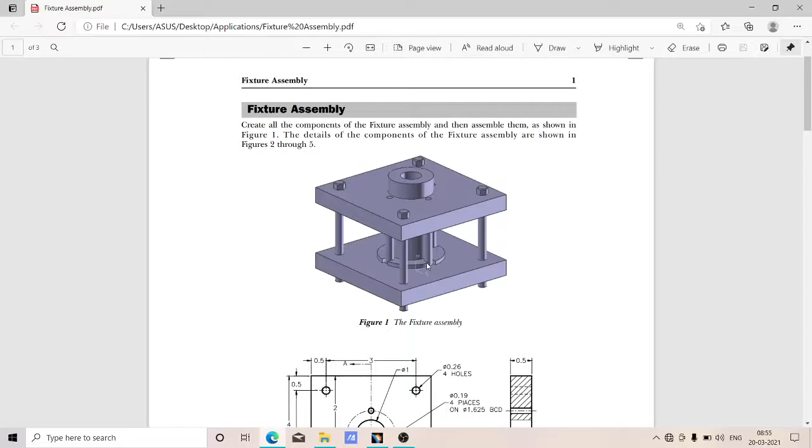Today we are going to make a disk from this fixture assembly. See, this is the disk. Now let's make it.

Select plane and now let's start. For that, first we need to make two circles of diameter 2 and diameter 1. So let's make it. Make two circles.

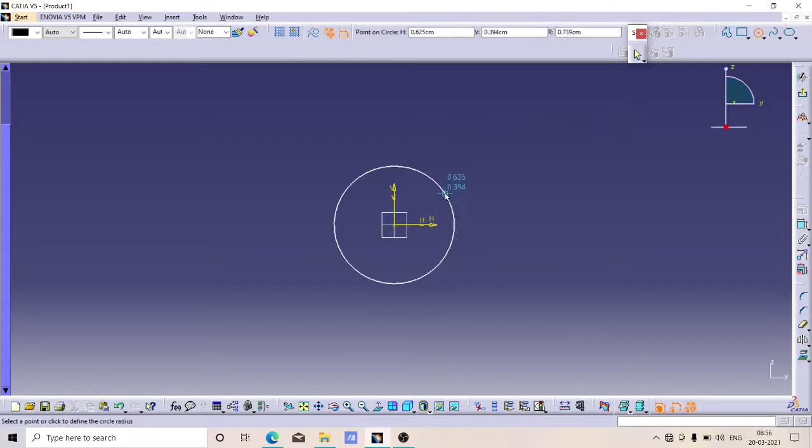From the constraint option you can give diameter to circle. This one is 1 and the dimension for this circle is 2.

Now our next step is we have to make these cuts to the disk. Now let's start it. First we have to make a circle here of radius 0.13. So let's make it.

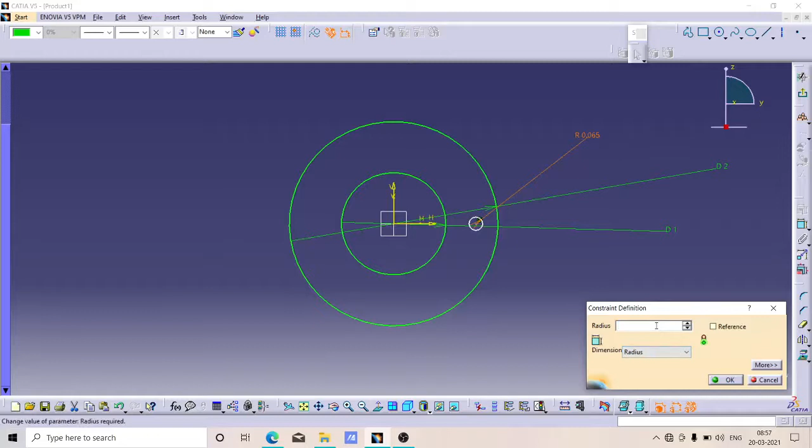Take the circle command on the center plane, make circle and give it dimensions as 0.13. Its diameter, we have to give radius. You can change from here, and the given radius is 0.13.

Now the given distance from the center axis to the center of the circle is 0.825. So after going on constraints, select center and this center and give dimension 0.825. Okay, after clicking OK, select profile and from this center go up and make one straight line.

Now this is your straight line. Again select this and do mirror against this plane, this axis actually. It's looking white in color. Why is this so? Because we didn't give it dimensions yet, so it's white instead of green,

but it's okay. Now trim this, trim this part also. See, now select this and select this and do mirror of this profile.

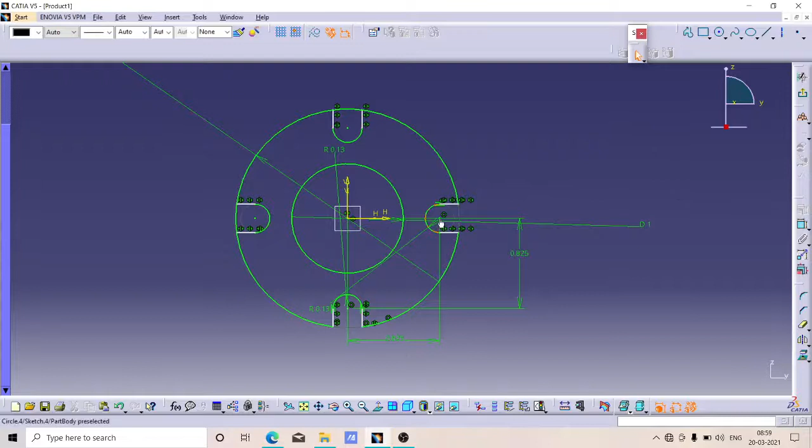I'm doing mirror against this. Now again take trim to trim this and this.

Now our end plate is almost ready. See, our sketch is the same as this. And now after the extruding command, after clicking on pad command, you have to give thickness of 0.125.

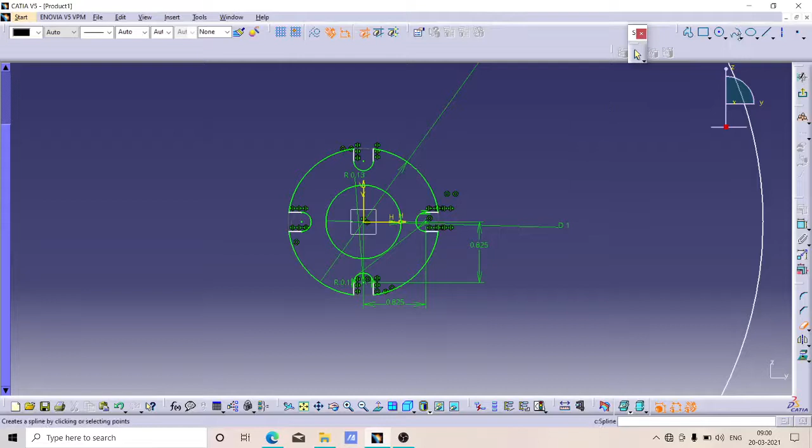No, it's taken mistakenly.

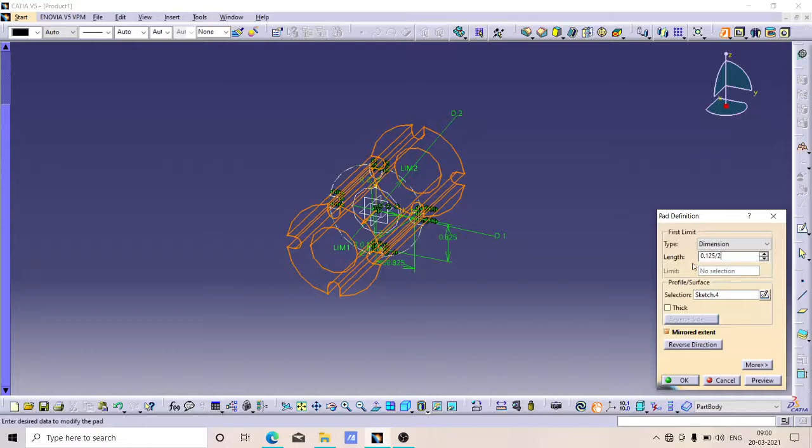Exit to workbench and then pad command, and first you have to select mirror extent, then here is 0.125, divided by 2, because we are dividing by 2 since we are taking mirror extent. So if you didn't take mirror extent, then you only have to write 0.125. Okay, our disk is ready.